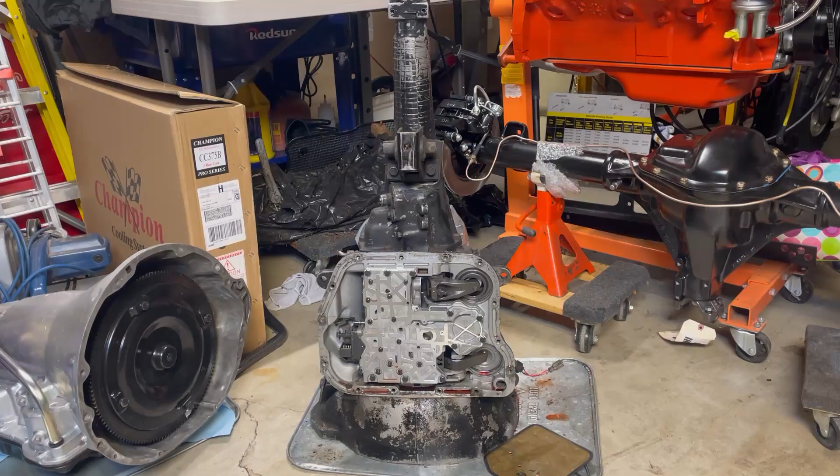Well, here's the core transmission. I pulled a 727 out of a 1983 or 4, I can't quite remember. What would it be, B350? D350 actually, sorry. Came with a 360.

I am pretty sure, not 100% sure, pretty sure this has been rebuilt recently. Within the last like 10 years. I'm not 100% on that, but I'm gonna show you why I have this theory. The first thing is, it's got this gasket in it. I don't know why they didn't like trim it down at all. So that makes me question the rebuild, but it does have a gasket.

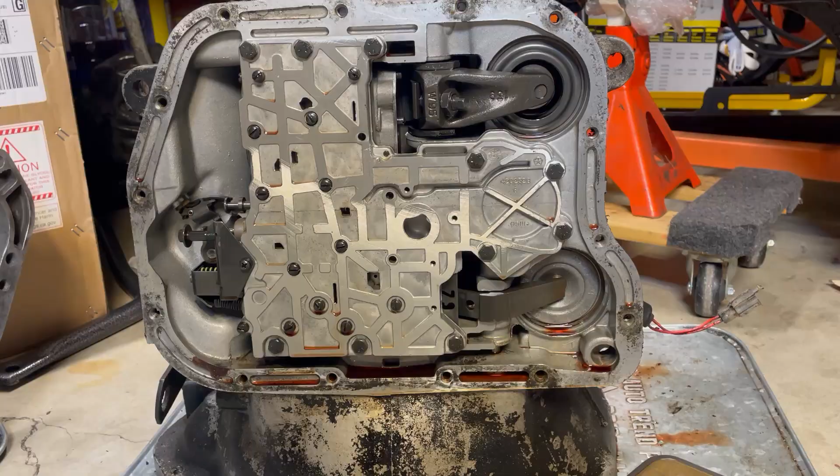And also, I don't know if you noticed, this is black paint. So someone took time to paint this, re-gasket for sure. And then on the inside's really, really clean. Now, there was a little deposit on it, and the filter has a little buildup of sludge or something. You can see that. But it's very, very clean. And it makes me think that this thing has been gone through.

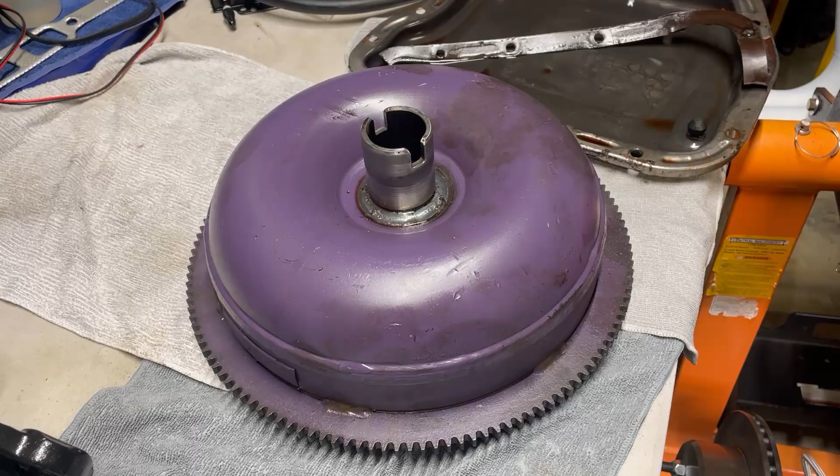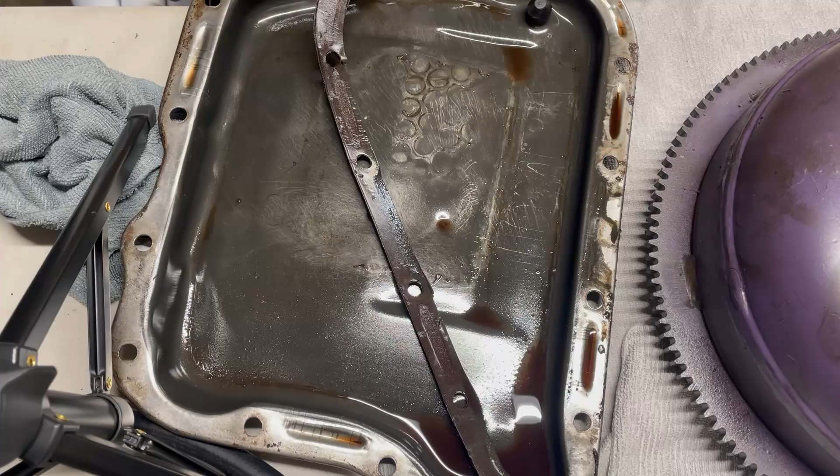And on top of all that, it has a brand new converter in it, which I don't know what it is yet, but you know, I'm thinking it's something truckish, towing related. Brand new converter. And here's the pan. It's got some sludge down here, but it's clean. And the pan has, or had, a trans temp gauge going to it. So they were even checking out the temperature in the truck. Now that's all just from the transmission itself.

The vehicle I pulled it out of made me think it drove into the pick and pull. See, it was dented up, but it was a very clean truck. And it looks like someone may have died or something, and they just drove it there to get rid of it. Now, it had a 360 in it, which I tore apart a little bit, very clean inside.

It has a 4-barrel Edelbrock 1406 carburetor. I threw that on the wagon, and it ran great on that. I barely had to tune it. It was perfect. So I think that this transmission moved this truck to that pick and pull where I pulled it out. So I do not recommend doing this, but the idea here is I'm going to put some new gaskets in it, just to be safe, so it doesn't leak.

I know how to do things right. This thing I did right. I went through every part of it. Now this other one, I should do that too. I don't recommend doing this. Taking a core from the junkyard and throwing it in, there's a good chance I'll throw this in and it won't even go into gear. But I'm taking an educated guess, and I'm gambling a little bit, and I may lose. But right now I don't have the time to go through this transmission. I would like my wagon back, and so I'm gonna send it, as they say.

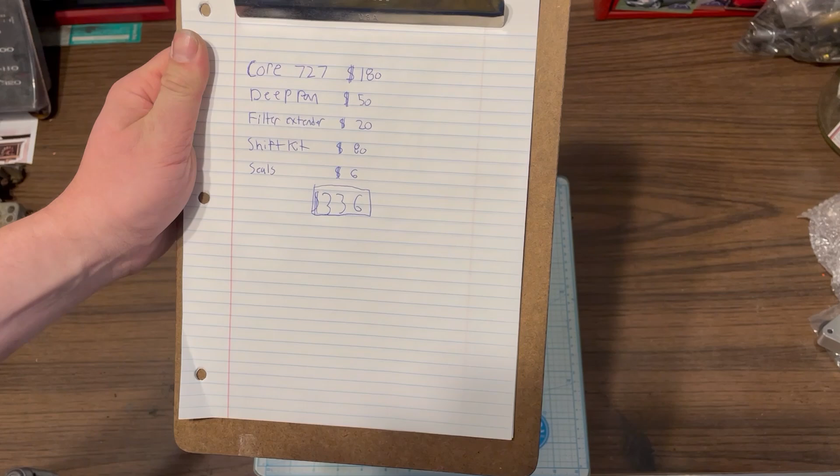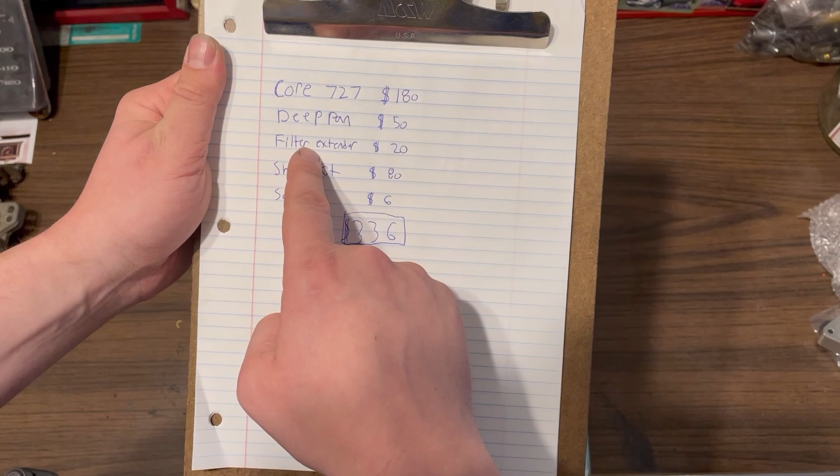How cheap, you may be wondering? Well, $336 cheap. So I picked up the core transmission from Pick and Pull with the torque converter and all that for $180. I have a deep pan, which I'll show you here in a second, the filter extender for the deep pan, and the shift kit for 80 bucks, 50 for the deep pan, 20 for the extender, and then $6 for seals. So not bad.

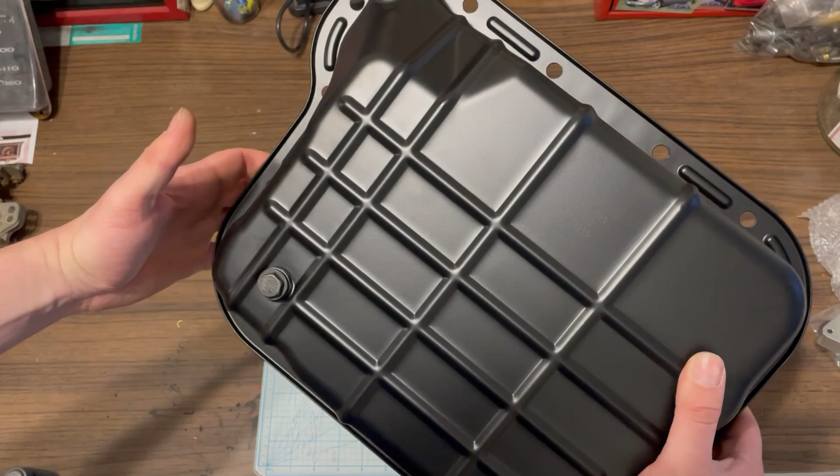Now, when you go on Google and type in 727 deep pan, you're gonna be like, whoa, those are pretty pricey. That's why I got the $50 pan. Now, the $50 pan, it's just stamped steel. It even has a drain plug, which if you have looked under any of your classic era Mopars, you notice they don't. It is a later pan off of like a 90s Dodge pickup with the later variant of a 727 with overdrive. So $50, it's a Dorman part.

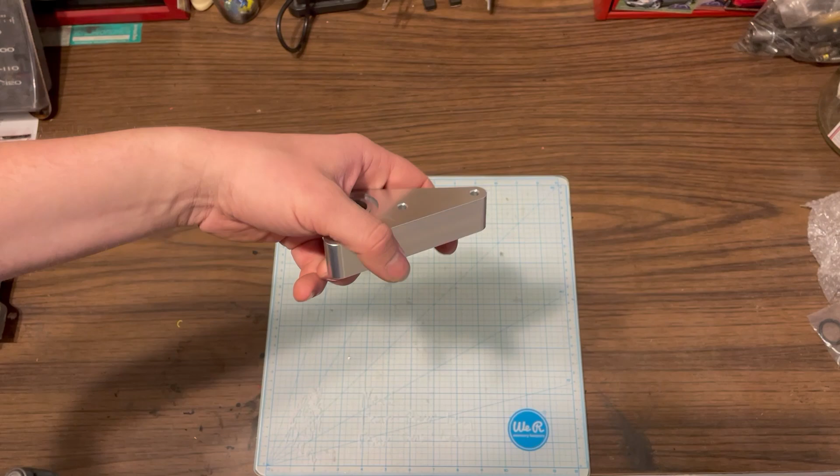Boom, there's the part number. I mean, cheap, effective. And then whenever you do a deep pan with one of these transmissions, get the extender, 20 bucks. Amazon, shipped to my door. That brings the filter down, the pickup down, and it's better in case it gets low. Just do it.

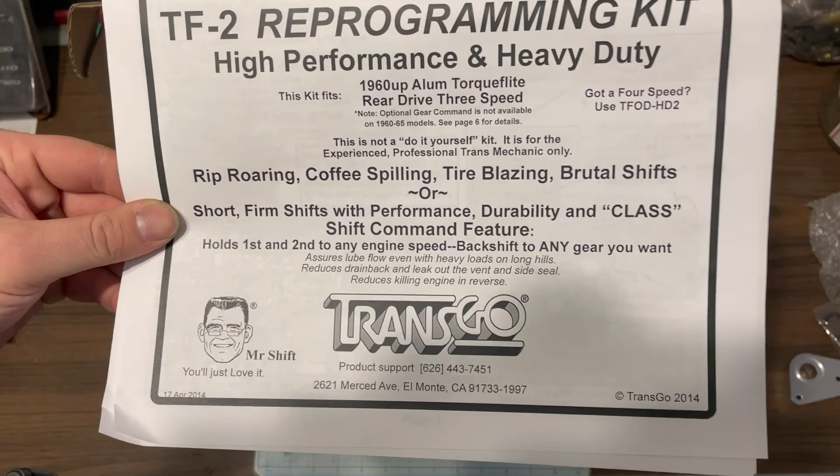And now the main thing, the thing I paid 80 bucks for, the Transgo performance shift kit. This is the TF2. I think that means TorqueFlite 2, if I would have to guess. Now, what I like about the TF2 is it's very variable. There's a lot of variables to it. You can make it fit your need. I'm just doing the short firm shifts with performance in mind. I am really just for towing. I want to save the clutches and all that, so just nice firm shifts.

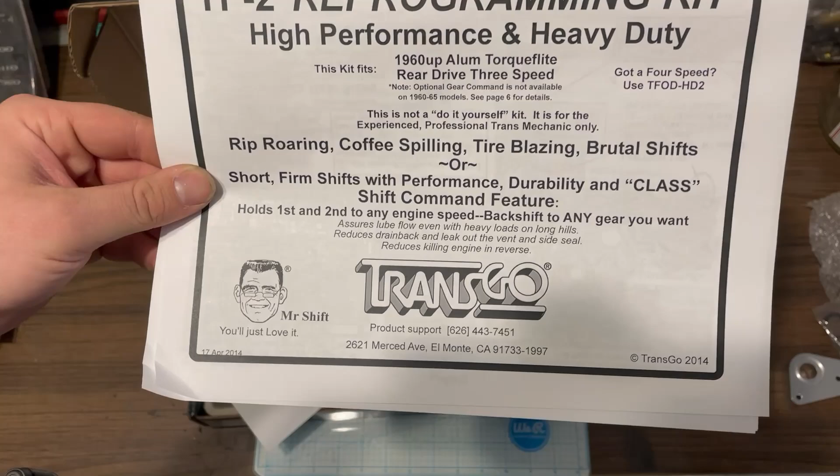But you're able to modify it all the way to the brutal shifts, and then you're even able to have gear command, which basically makes it so if you take off in first and you put it in second, it'll shift to second. You put it in third, it shifts to third, and if you want to go back down to second, you got to put it back in second. With a normal TorqueFlite, if you have it in first, it'll be in first. You put it in second, it will go first to second, up and down, and in third it'll go third, second, first, whatever you need for driving conditions. I don't recommend that unless you were doing a real race car. But besides the point.

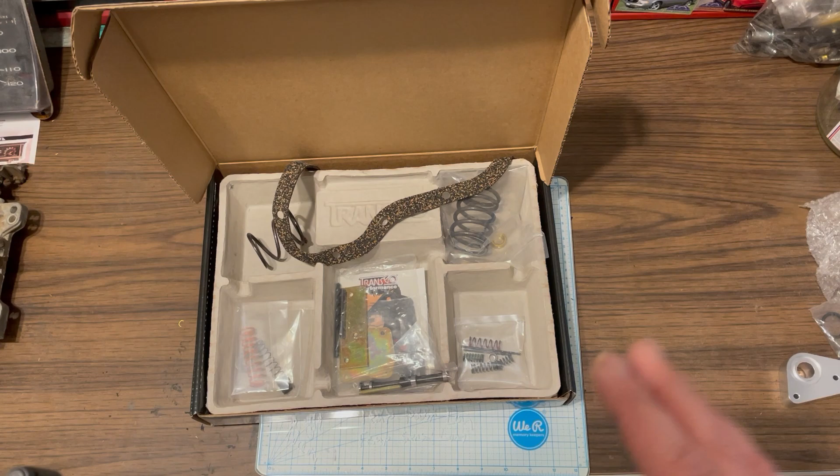So I will show you what I'm doing with this for my needs, roughly show you what I'm drilling, and go through instructions with you. As you're going to see, you need a very neat, clean work surface. This is a sit down and do it all at once. Be focused. Valve bodies still kind of scare me. They are really a marvel of engineering, in my opinion. Early automatics are a marvel of engineering, not needing anything but pressure, allowing it to shift up and down. Besides the point, I'm rambling. So yeah, I will be showing you how to install this. Won't this be fun? It always is.

All right, now we're gonna get into it. I'm gonna take the valve body out itself. The valve body is just held in with these bolts. It is 7/16, if I remember correctly. Yep, 7/16. And then you also have to take off the linkage where the shift shaft is. That is just a couple half-inch, I think, nuts. One of those sizes, half-inch, 9/16, 7/16, for both of them, and they slide right off.

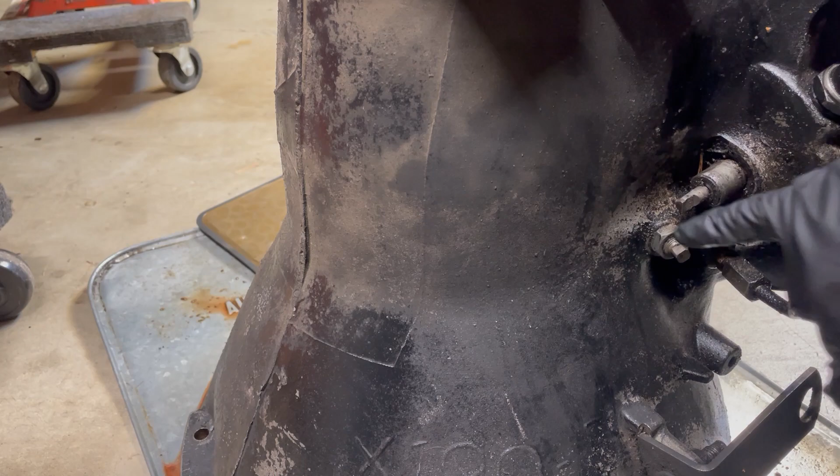I know we're at a little bit of a weird angle here, but this is the top of the 727. Up here is where it bolts to the motor. This right here is the shift shaft. There will be these two brackets, and they just slide on here. You unbolt them, pull them out. This will come out with the valve body. You may have to pull and tug a little bit, but that's what it's gonna be hanging up on. Let's try to get this valve body out.

Now, the valve body is the brain of the transmission. It does all the crazy stuff. Out of everything else, I understand the valve body at least, because on these older transmissions, it's all fluid pressure related. Some smart men drinking some big cups of coffee, wearing some nice ties and white shirts, did some math, and I don't do math that well, so I'm just amazed they came out with this and made it reliable and made it strong.

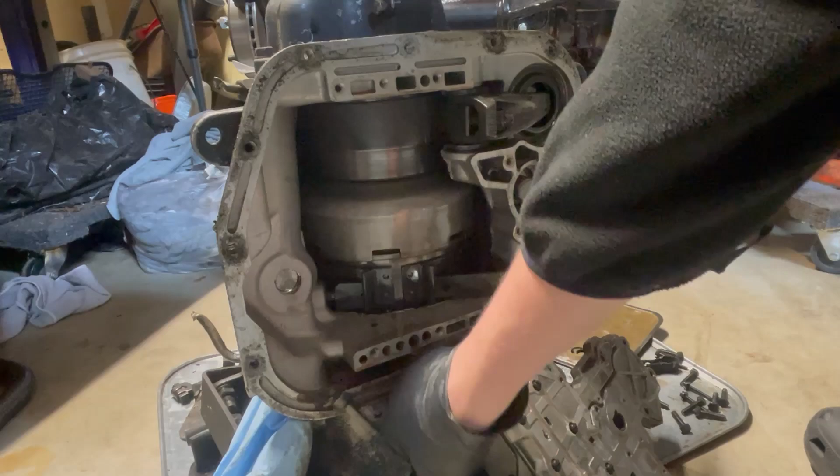Boom. So yeah, it just kind of falls out. So putting it in, the hard part about putting it back in is this parking rod. You can imagine it's like a gear in there, and this goes in, indexes in, and puts the car in park. So you may have to mess with it for a little bit, but it will go. Sometimes it's a little bit frustrating, but it will go.

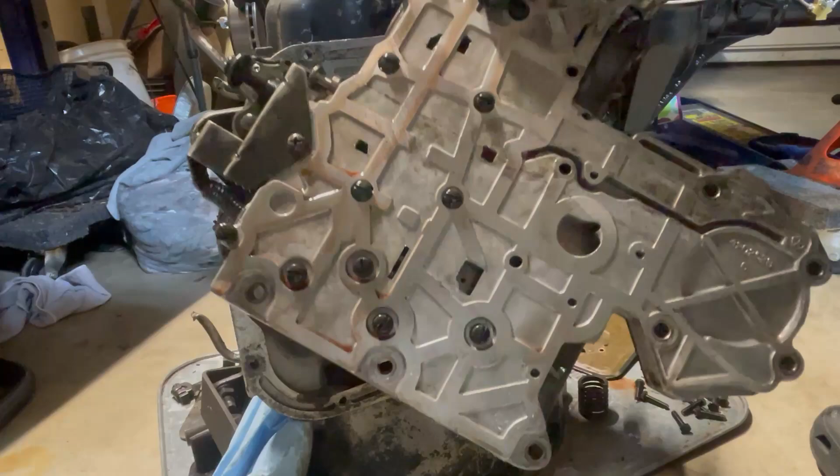Boom. So yeah, those 10 7/16 bolts, make sure those two shift linkage things are off, and it pulls right out. Super easy. And the scary part is cracking it open. All right, now I'm gonna separate the valve body. Gotta get to the plate in between so we can start doing the shift kit. Fairly easy. Just a bunch of flathead screws. This is a tragedy. All right, new screwdriver. Here we go.

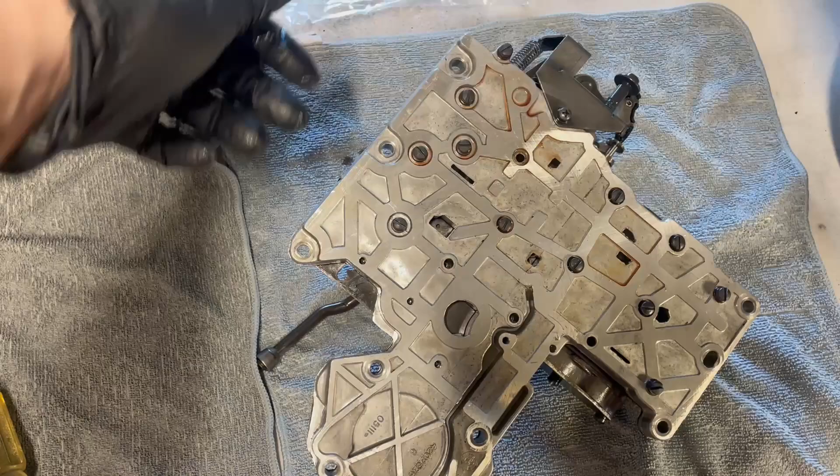You know, there is a chance, small, but there's a chance that this is already, I mean, I can see the screws have been a little messed up there. There's a chance it already has a shift kit in it, but we're gonna have to find that out ourselves here. That took a lot of muscle and a pair of vice grips, but got them all out.

So once this Phillips screw's out, the top plate here is just gonna slide right out. Now, be careful. Ooh, not the camera, be careful. Because down here in the bottom part, there is a bunch of check balls, and you don't want to lose any of them. They're somewhat important. But there is the maze that is the inside of a valve body, the passages for the fluid to go under different pressures.

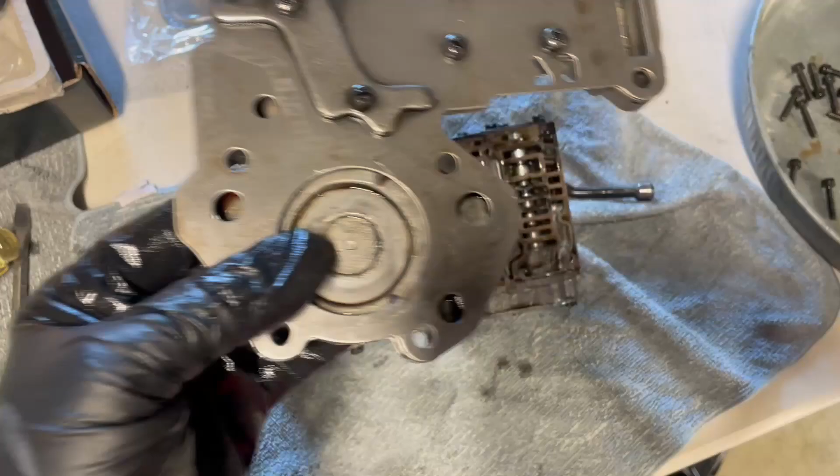I'm not seeing any modifications yet, but I'm gonna look a little deeper here and take some stuff apart. All right, I'm gonna remove all the check balls here. We'll just note if we see anything different size for later. Right here I'm noting that one's large. So the rest of these, those two are the same size. That's the same size. That's the same size. That's the same size. It's not metallic.

Screwdriver here. Interesting, that one's not magnetic. There's a piece of debris I picked up. Alright. Okay, that is all of the check balls, ball bearings. Alright, I'm gonna fully take off this separator plate. It's just 5 more Phillips screws, and the plate will be off. Once we get it off, see some sludge down there I want to clean out.

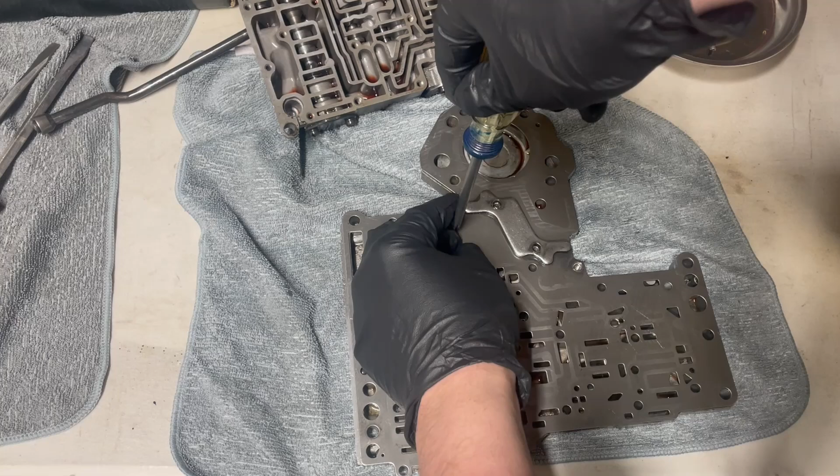But this has definitely been gone through. I've been looking for any signs of a previous shift kit, because there's a lot of ways to do shift kits. So my concern is putting a shift kit upon a shift kit and then nothing working. That's the main fear. But the beauty of it is I have a second valve body in the car. So if it does do that, I'll just take it back out and do it again to that one, because I know that one has not been messed with ever.

I don't know if this one's been messed with either. I haven't seen much evidence. The only thing is there's some scratching down here, and it looks like a hole was drilled. But if that's it, I don't know. Maybe that's a small modification they did to valve bodies. Okay. Pull it off. Put it down. Nasty, not bad. The other one I did was way worse. Sweet. So this is the thing that we're gonna do a lot of things on probably.

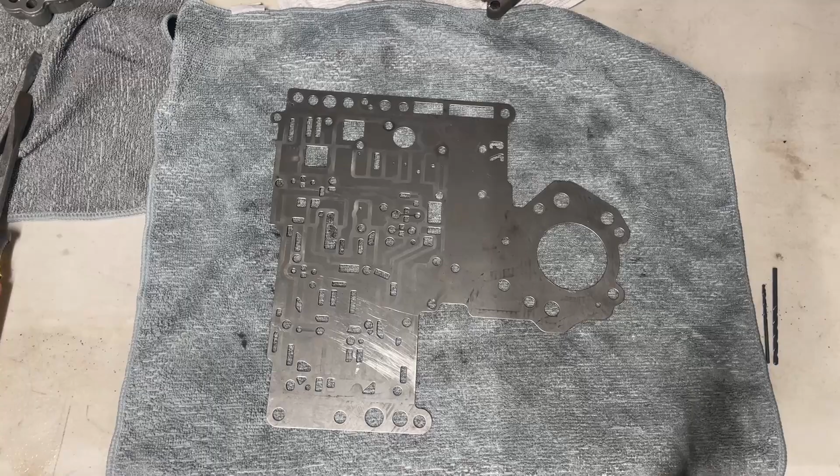All right, so I did some investigation. I haven't found any modifications in the actual casting of the valve body, but this plate has been modified per specs actually of the TF2 kit. I currently think this went through a guy who knew what he was doing, hopefully, and I think he just drilled these out to try to make it slightly better for the truck. But I'm gonna go through and explain to you what he did.

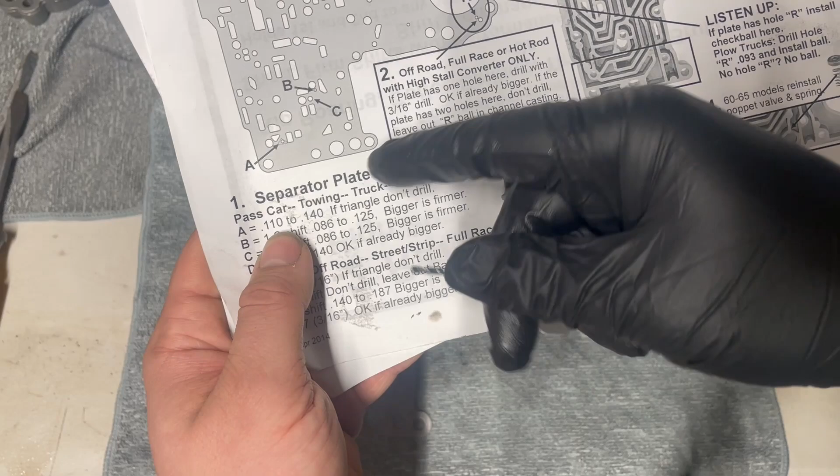And yeah, so in the TF2 kit, we are going for up here, passenger car, towing, truck, motorhome, that size. You have 3 drill bits. You don't really need that one right now, but the .086 and the .110. I have the 110 right here. So A, down here, A is 110 here to 140. And if it's a triangle, you don't drill. I, again, just for a passenger car wagon here, only want 110. So that is down here.

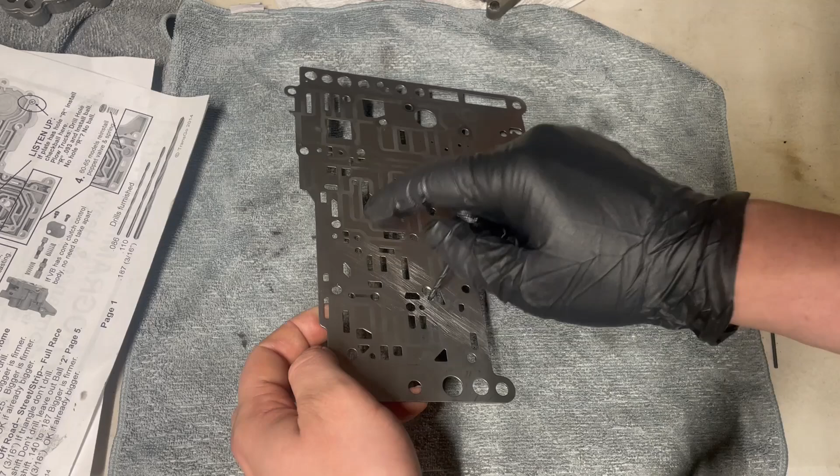That was drilled out to 110. Then we got B. B's up here. This one was also drilled out, kind of crudely, but drilled up to 110. Okay. C down here. B and C are 86 thou to 125 thou, so 110 is in the middle for both B and C.

D is all the way up here. D is 110 to 140. Okay, it's already bigger. So D would be this one, slightly bigger than 110. So yeah, that was already done for me. So that's kind of nice. So now I'm going to go through the valve body casing itself and modify this, and then we can put it all back together.

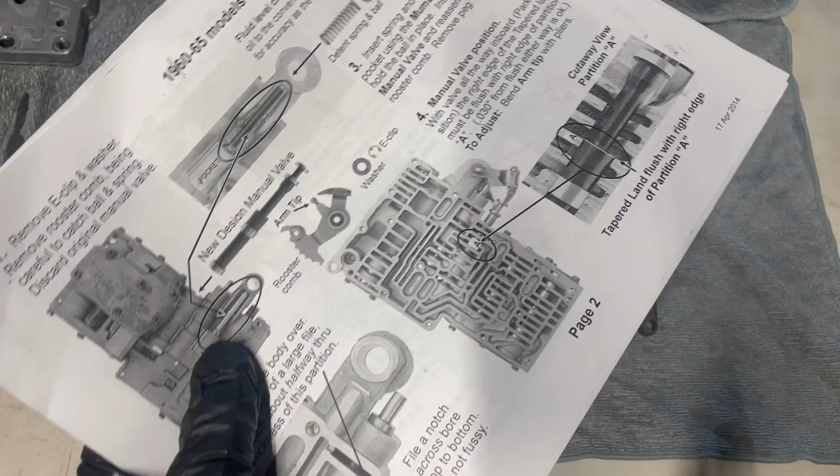All right. Now we're on page 2 here. So we've got to remove this system so we can get the manual valve out to put the new one in. And then we'll have to notch it with the file into the casting. And that'll be right there. We'll file it right there. And then we'll go over the rest of this as we do it. And that will be page 2 out of the way for the shift kit.

So there's just a little E-clip there. You're going to want to be careful when you do this because there is a ball and spring for the detent rods. So you see it there. There's a ball and spring in there, and that allows you to shift it from park to first, to reverse, neutral, drive, and all that. So just be careful, you don't want to lose that. Semi-important.

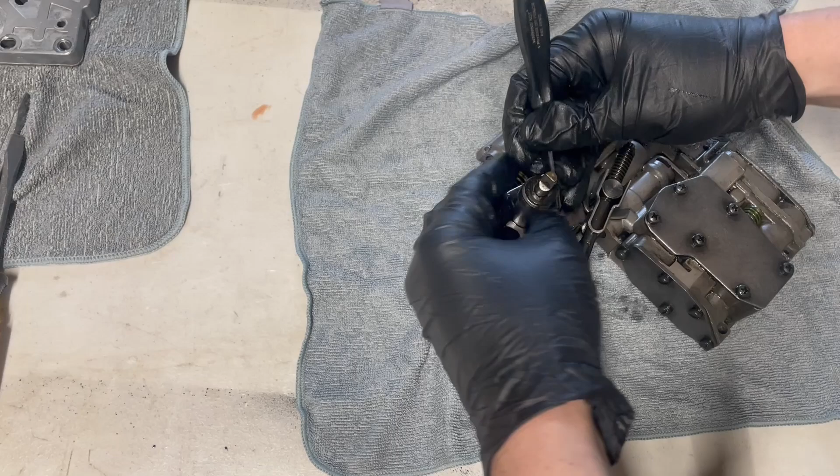C-clip out. Got the little C-clip out there. And a little washer. I'm gonna take my little pick and see if I can just get the tension off of it. We really don't want to lose that. It's kind of vital. I did it last time and lost it, and it really sucked.

Okay. Take that off. There. Take that off. That's out like that. All right, there. Grab the spring. And where's that? Oop, don't drop that. Pick the ball up. And I'm gonna keep these together. Get some tape. Just because I think it's a special size. And we don't want to be losing that like I did last time.

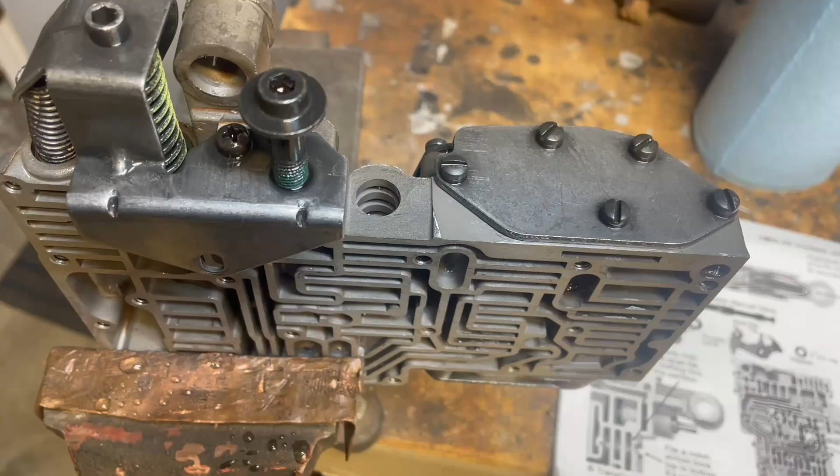All right. So on page 2, it wants us to file about halfway through the valve body, basically in the center, so about that, halfway through. It's not precise, you just gotta do it. So I try to get pretty centered. Like that. And then I'll just keep going here for a while, and we'll get halfway through it.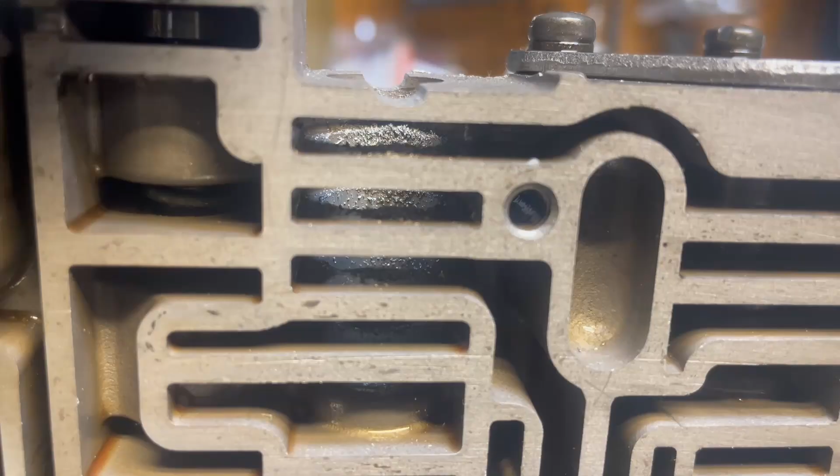All right. Filed it for a little while there, and that's about halfway through. I'm happy with that. So now I'm going to thoroughly clean all the shavings out. As you can see down the bore there, it's all filled with aluminum shavings. And yeah, I'm very happy with that. There's the photo I'm still going off of. Should be good enough.

All right, I very thoroughly cleaned it out. You want to get all of the aluminum dust out, just as much as you can. So I got it all out. Now it's time to put this back in place. Let's see here. How am I gonna do that? So that's gonna go there. Okay. So I'm just gonna do that.

We are gonna need the detent ball and spring here. That off a little bit. Okay. So spring in. Ew. Plastic off there. Come on, get off my hand. So you get this peg. Basically the peg will hold the ball and the spring in place. You'll pop on the rooster comb and then pop it in and it'll pop out. And that just makes life a whole lot easier than dealing with... yeah, this is gonna take a few tries.

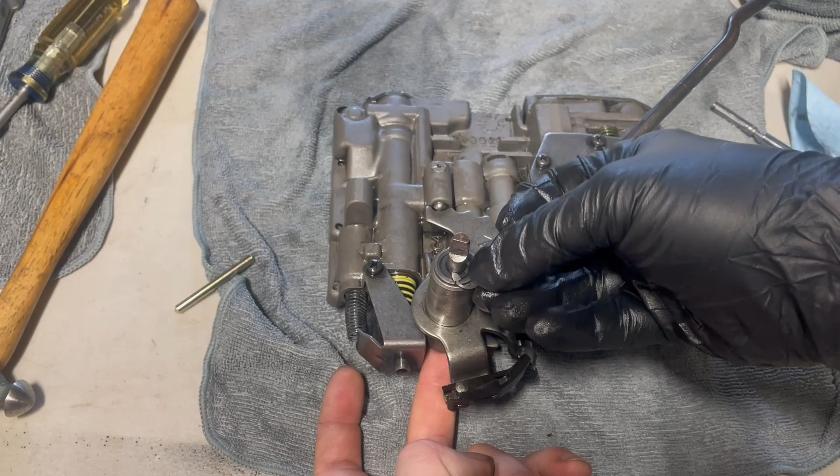Put the washer back in. Washer. And then the E-clip. Reach out over here. Oops, come on. Boom, E-clipped in. Back over.

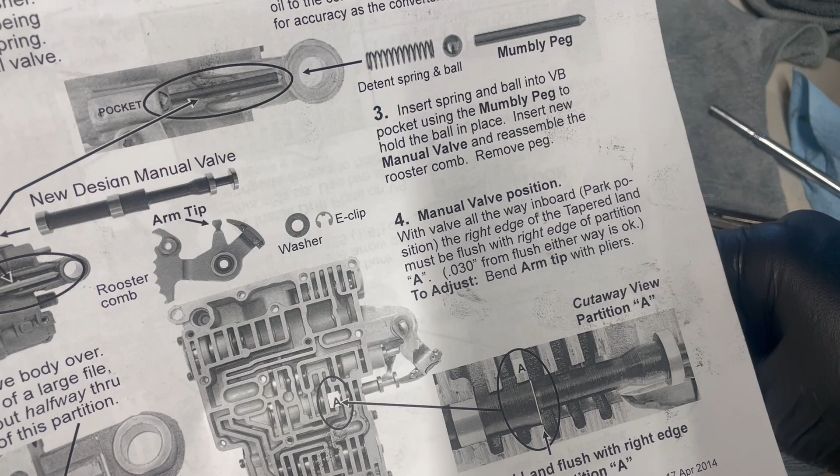Now, it says on the sheet, manual valve position. With the valve all the way inboard, in the park position, the right edge of the tapered land must be flush with the right edge of the partition A. So that would be right here. 30 thou from flush either way is okay. To adjust, bend arm tip with pliers. So let me see here. Make sure it's in park.

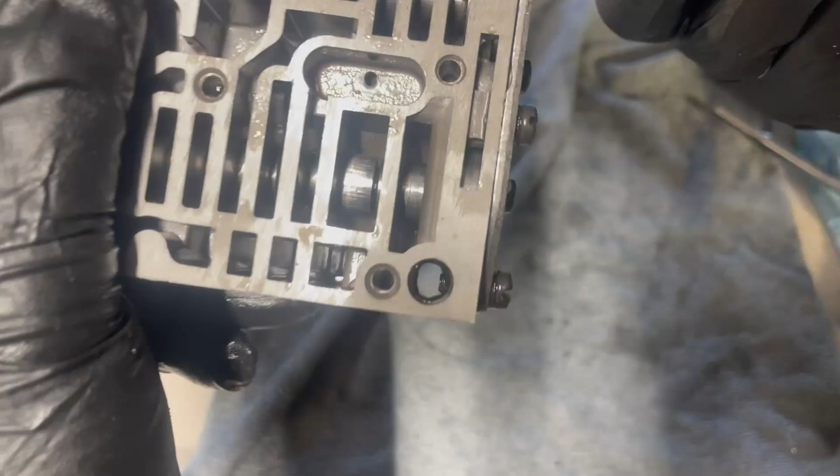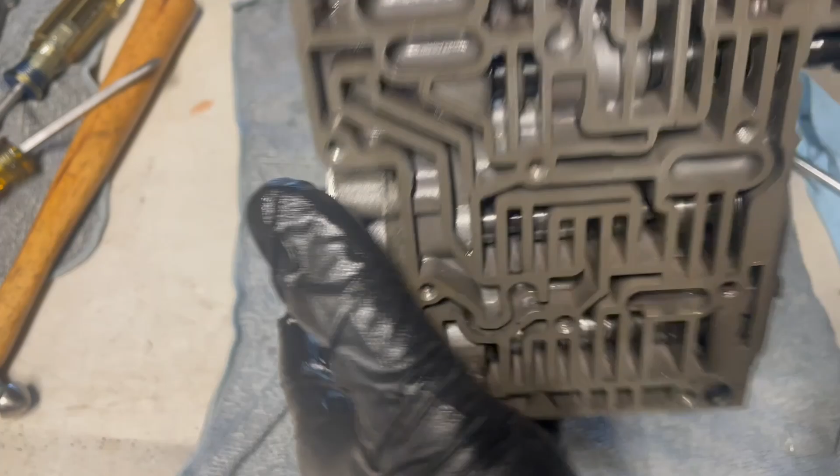That should be park. No, that should be park. I'm thinking that. Shit. Yeah, that's flush. Beautiful. So that's page 2 done.

All right. So just a reminder here, go through your instruction thoroughly when doing this, because this page is a good example. There's a lot of different types, because they change these a lot, they use them forever. There's some variations of these valve bodies. So, like here, 77 and up V8 trans with lockup. This is a non-lockup unit, so we're gonna ignore that. 77 up type valve body has 6 or 7 passages. Mine has 6 passages.

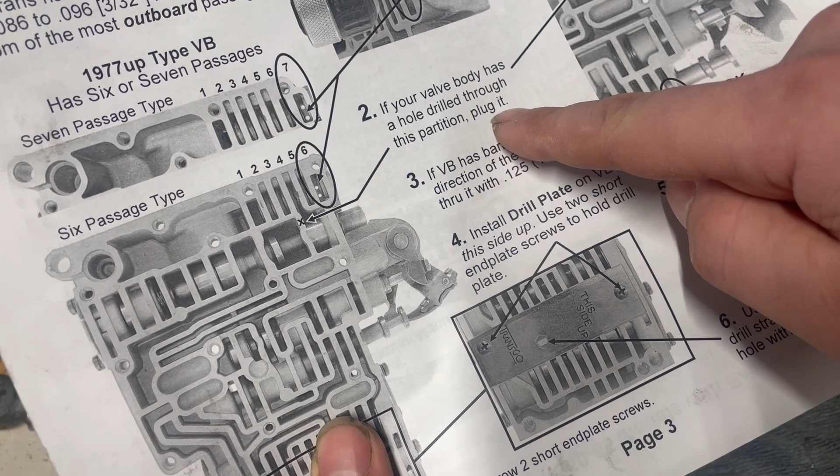If your valve body has a hole drilled through this partition, plug it. Do I have a hole? I do not have a hole. Boom. Valve body has barrier here. This direction, drill. No barrier. Okay. Boom, look at that.

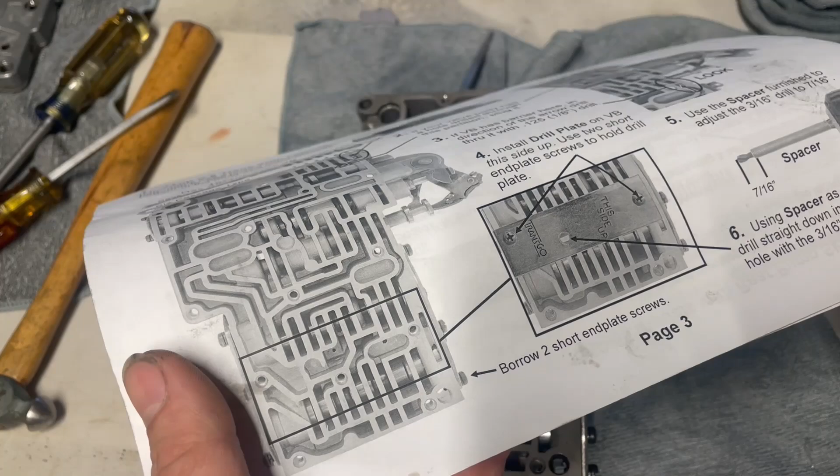So now on 4. Install drill plate on valve body this side up. Use 2 short end plate screws to hold drill plate. Use the spacer furnished. Okay. Easy. We'll grab the plate and we'll show you how to do that. All right. Plate's on. I just used 2 Phillips screws for this area over here, bolted that down. So that was super easy.

And then what you take is the biggest drill bit they gave you in the kit, which is the 3/16 one. It's the biggest one, and it's in the same package as this. And then they give you a spring. You're using that as a spacer, so you don't drill too far down. And they have it at 7/16 showing. So it's about 7/16. Probably go a little bit. I'm gonna call it good.

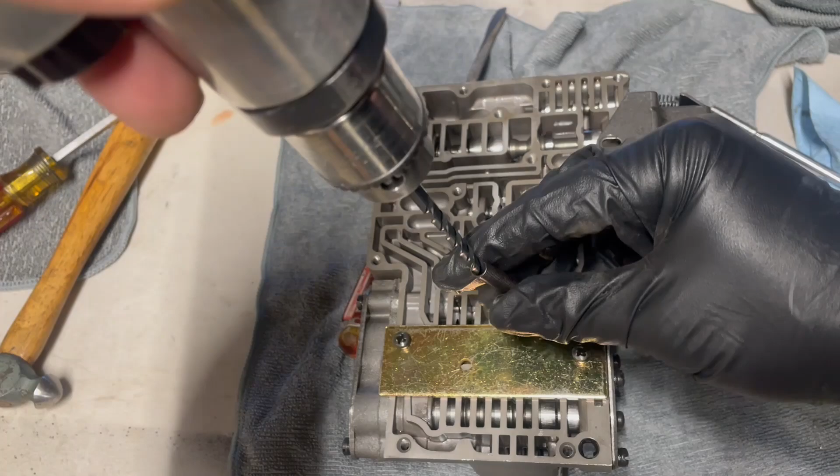And then, yeah, so let me just stick her in there, the spacer on, drill it, and then clean the valve body really good again for the second or third time. And that mod is done. So I'm gonna just do this off camera just so I can focus and do it right. But it's very self-explanatory.

All right, so I took this plate off. It was just two Phillips screws holding on still. And I pulled out from right here the TV valve, is what they call it. And for me, I got to grind this down to about 9/32. So I'm gonna do that, and then I'm gonna reinstall it with a new spring, which will be either the yellow or pink one.

So same diameter, so that's the pink one. There we go. So yellow one. So that guy's going in. With that. And yeah. So I'm gonna grind this down really quickly.

Again, the sheet even tells you the diameter to grind it down to. So you can use that as a reference guide to how short you need to make this little stem. So that should be easy. And then I will put it back together. Nice. Time to throw it back in. And then on to the next step.

All right, we're on to page 5, which is mostly about the PR setup. So the PR valve. Try to keep this nice. All right. So PR valve. We are going to remove this. We're going to remove the valve itself.

Okay, so we will be replacing... first, we'll be adding a shim. We got a new, what they call this, spring seat. And then we have a new, slightly heavier duty spring, outer and inner spring. So, pretty simple. Let's get to it.

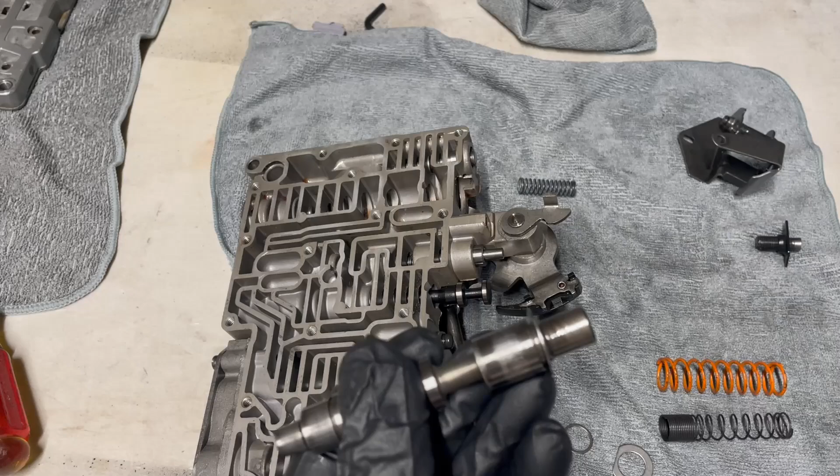All right, put our glove on. Touch the nasty stuff. And wipe this down quickly. Perfect. Here we go. So, take the old ones, put them aside. Interesting. So this already has a spacer and a seat. So I can't remember if that's stock like that, or maybe this one has been already slightly modified, but we got new ones.

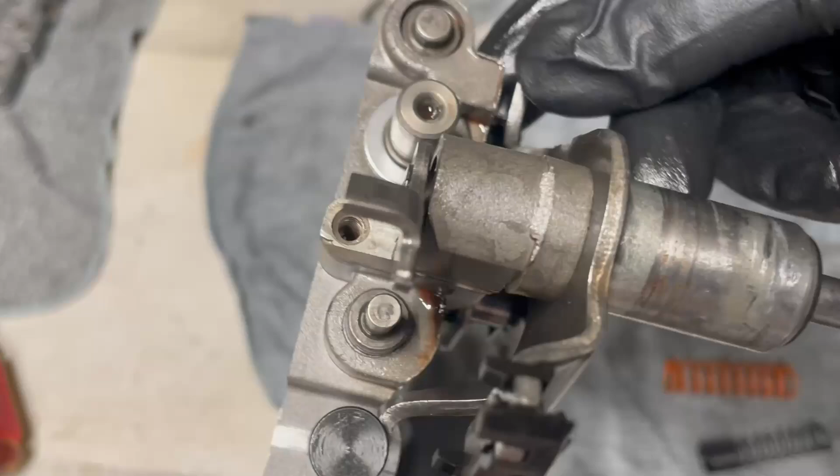Boom, boom. In. So instructions say you want to make sure, oh, come on. You don't want the seat, this one with the flat edge, you don't want that catching on the casting at all. And if it does ride on the casting, it says to file the casting down so it can't. And I have a little bit. Yeah, it's in there a little bit.

Yeah, and it says, install spring seat as shown, make sure flat on spring seat has some clearance from casting. File casting if necessary to give it a little room to rotate slightly. Do not allow to bind between PR valve and casting, with an exclamation mark. So, I'm gonna take this back out. I will file that and be back shortly after I file this and try to make it work.

All right, now it's all fitting good. I cleaned the valve body very, very thoroughly again, trying to get as much of the dust out of it as possible. And I reinstalled it here, put the springs on.

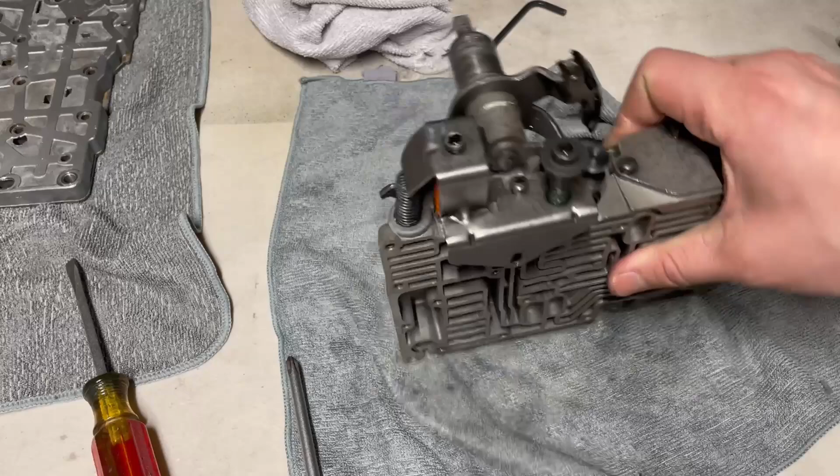I want it to be known, as I got frustrated, and as soon as I turned the camera off, I did it like first try, no problem. So I want it to be known and stated that I really tried multiple times to do it on camera, and then, anyway, this is now on.

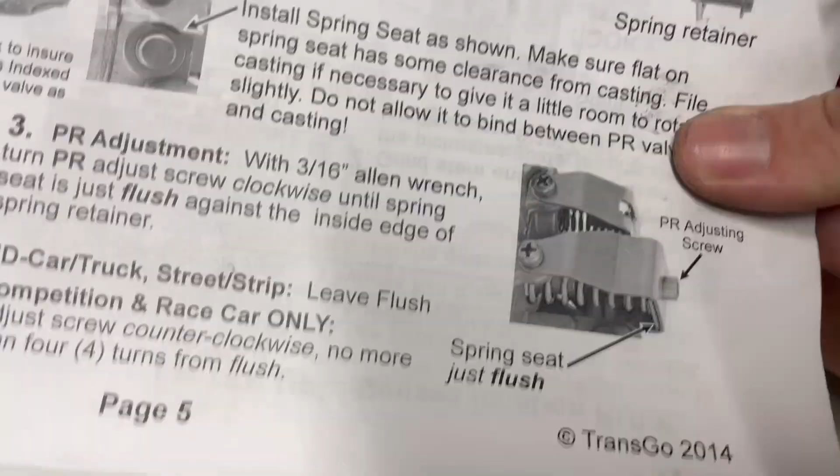Now the instructions also say here the PR valve adjustment with a 3/16 Allen wrench. Turn PR adjustment screw clockwise until spring seat is flush against the inside edge of the spring retainer. And there's a photo of that. Just one more time. Flush.

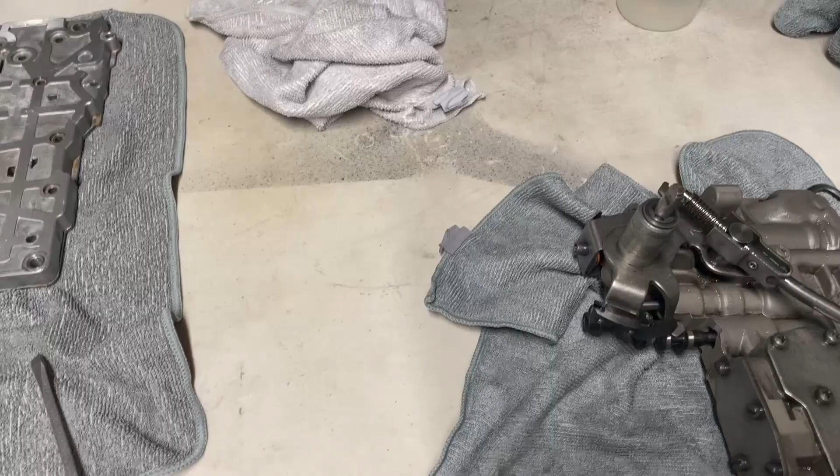So that's just for heavy duty. For competition race cars, they say counterclockwise, no more than 4 turns from flush. But again, going in a big old wagon, so good enough for me. So the next page is for shift command, which allows you to grab any gear when you want. Not doing this, again, that's more for race car, but that is an option on the TF2 kit.

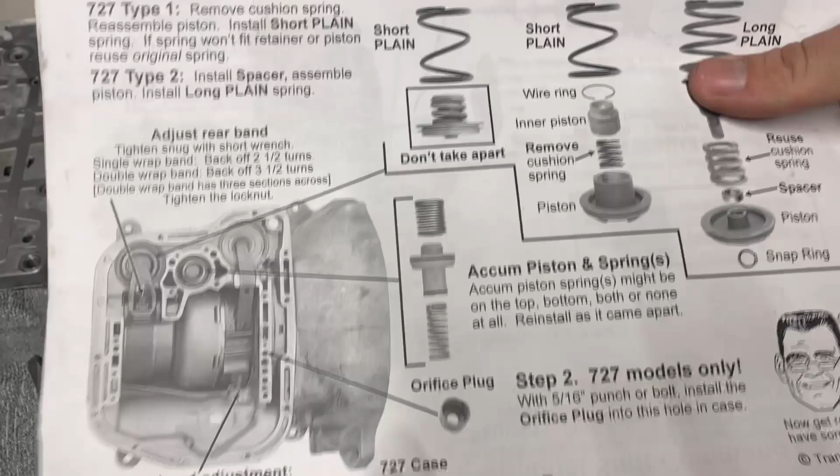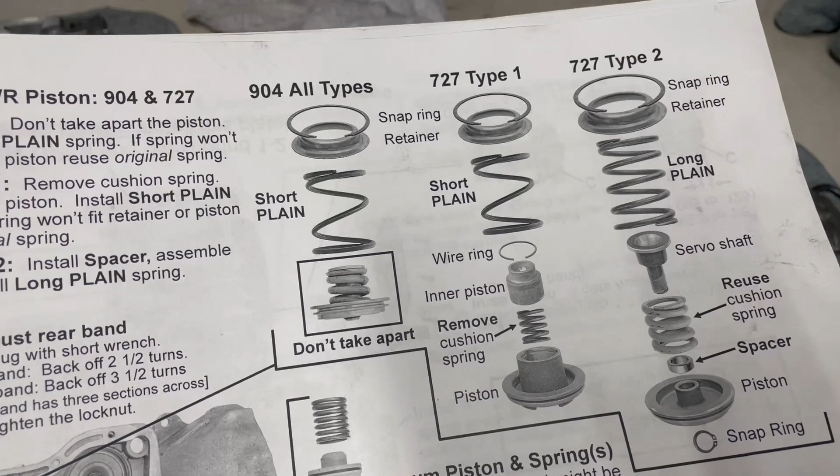All right, so we are on the final page here. So we are gonna plug an orifice and make it smaller to build line pressure. And then, I think I have the type 2, not for sure, but we're going to modify one of the pistons here. And then we have some new adjustments for the bands. So we'll tie those up, and then we should be all done with the shift kit. So let's go on to that final portion.

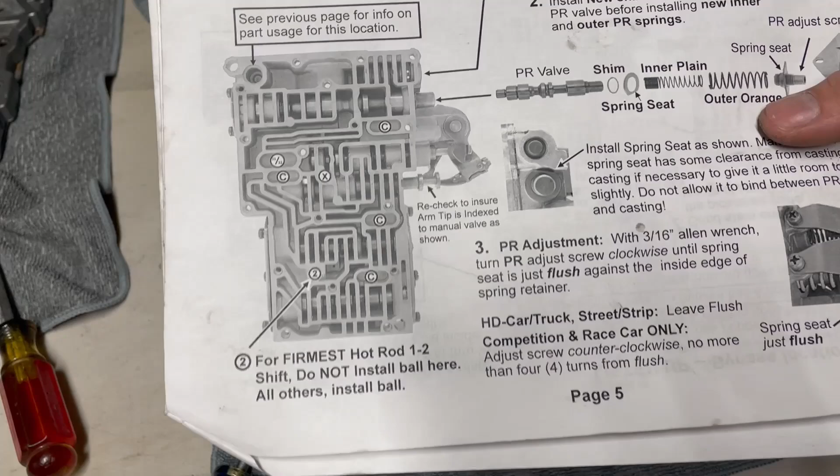All right, so before we go on to page 7, sorry, we have to finish up page 5 here, which is just gonna be check balls and reassembling the valve body fully. So I'm gonna go over all the check ball locations and putting them back in. And then we are going to put the separator plate in, screw the other part of the valve body on after I double check everything, make sure it's all fully clean. And then the valve body will be done fully. And then we can go on to all the extra stuff in the transmission itself. And we'll be rocking and rolling.

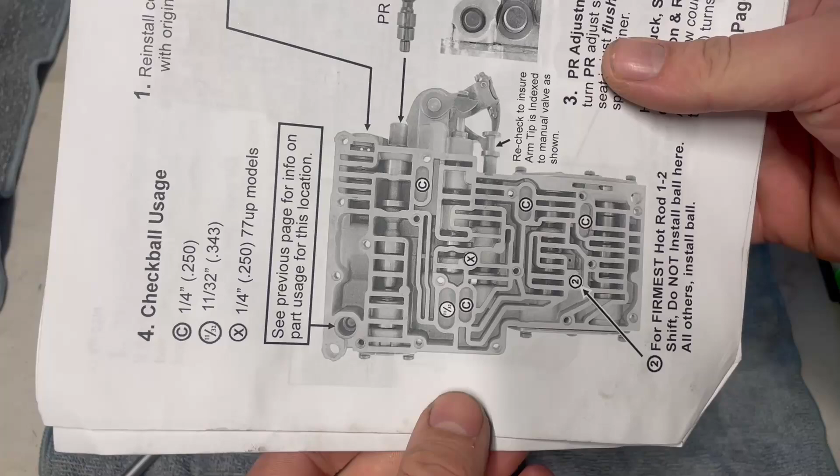All right. Installing the check balls. So here we got it lined up there. So big one goes there. Boom. I have a 77 and up, so that one goes there, there, there. This one is for firmest shifts, hot rod 1st and 2nd shifts. Do not install ball here. All others, install ball. Again, going in a big old wagon, so we won't put it there. We will put it there because I don't need harder shifts. So yeah, let me start grabbing. Boom. Boom. Boom.

Boom. Boom. So this one, the one that you don't have to install to get the harder shifts, was a, I don't know, it's non-magnetic, whatever it is. So I'm putting that back in there because whoever put this together probably knew what they were doing. So it was there. So boom. That is all the check balls in.

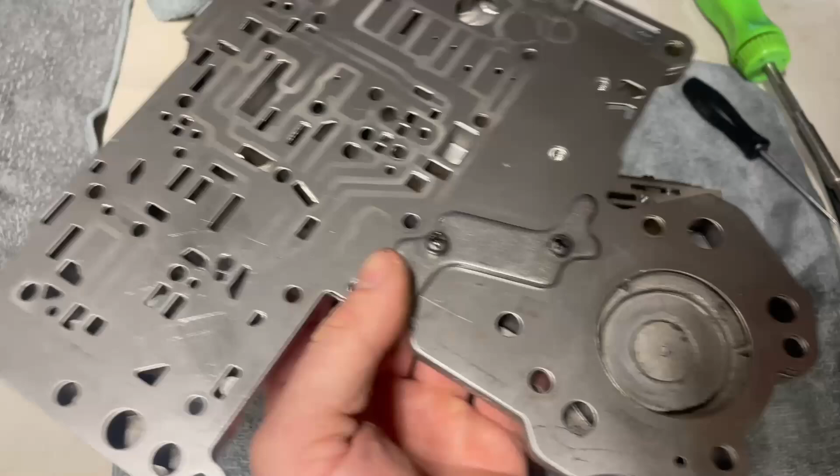So now I'm going to throw the separator plate on, the other half on, screw it all together, and install the valve body back into the transmission. So I got the separator plate on the other side, put the stiffener plate on. Threads were actually kind of messed up here. I had to take the washer off this one, which is probably not recommended, but I don't feel like fixing the upper threads at all. So we're just gonna run that. So all the check balls are in.

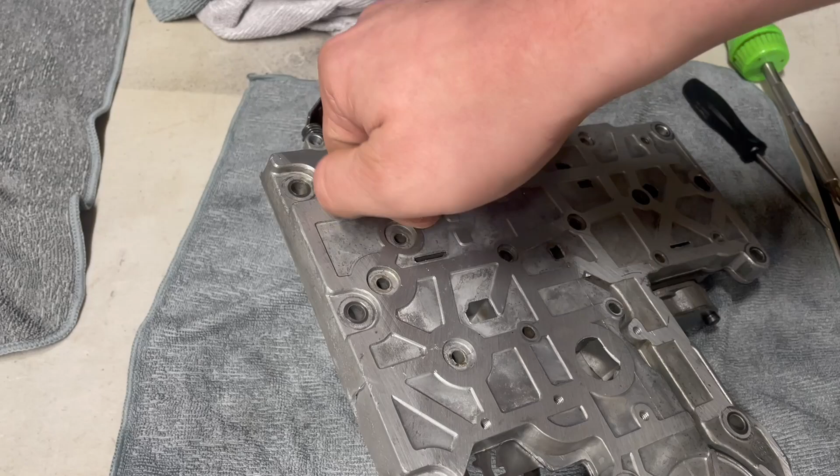Should be something like that. Okay, I see. So we got it in. Time to throw some screws in. I will come back once I get all these screws in and tightened, not too tight this time. Won't do what the last guy did, but yeah. So I'll be back in a second.

All right. All the screws are tightened down and torqued. The one thing I want to note is on the stiffener plate slash separator bracket here, I didn't note, there's 2 more screws there, and there's 1 more screw underneath this all. So don't forget those. So now I am ready to throw this back in the transmission. But before we do that, we have page 7, final page.

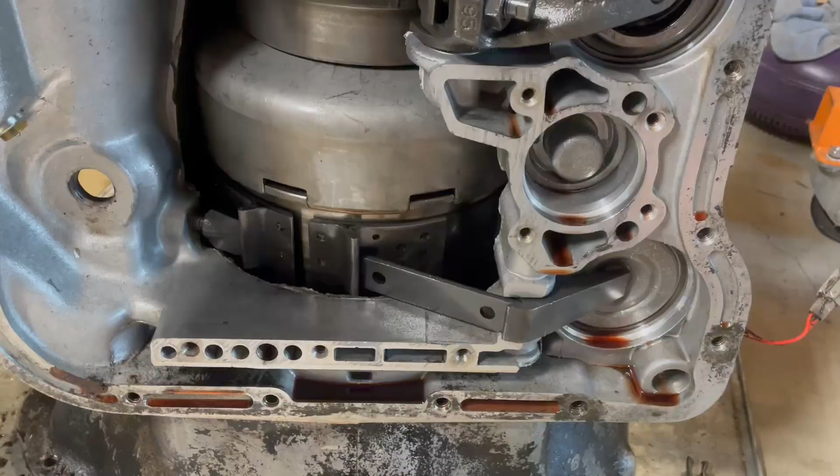All right, got the little orifice plug that goes there. I have a feeling I'm gonna hit it once, it's not gonna work well, and then I will cut to it being in, because... all right, I'm gonna cut to this being in.

Installed. So to get this out, you need this out of the way. And there is a little metal tab clip in there. And I've heard some people say they can get it out with this in place. I was not able to. I tried for probably 15-20 minutes and I gave up. So to do it properly, what I'm going to do now is you remove the 6 9/16 bolts for the tail shaft, 2 Phillips screws.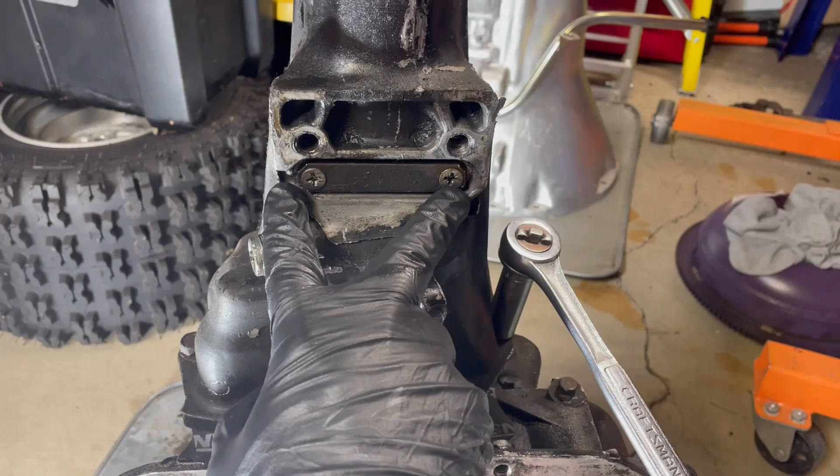There's a little thing, squeeze. Tail shaft will come right off. And there's a pin here that holds this arm on. We're just going to pull it up, knock it up, pull this out of the way, get access to this. I didn't want to do this because now I'm going to need either a new gasket or, I mean, who knows how this is going to go, but we'll see what happens. A little extra work, but we're doing it proper, so it'll be worth it.

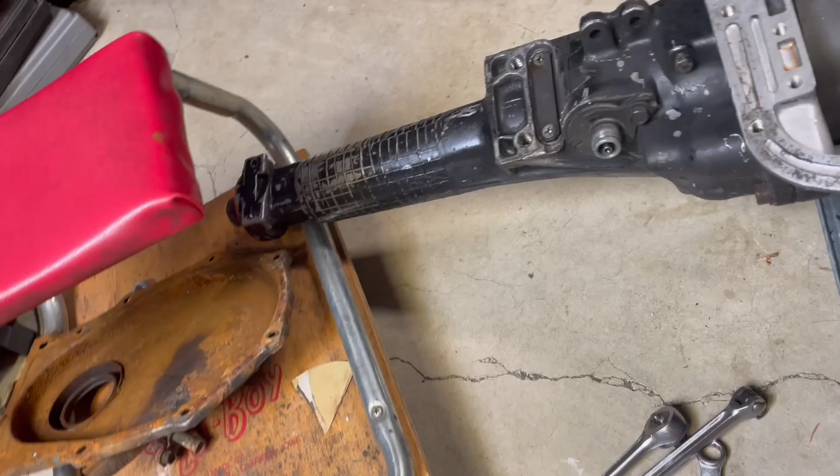All right, I get you want things to be tight, okay? But that shouldn't require this to break it free by hand, with all the force I give it. Don't do the ugga-duggas, I beg of you. I already did it, but you just do that. And then that. And then you do that some more, and it'll come off.

Side note, for me struggling for like 15 minutes, you gotta take the speedometer gear out if you want to take the tail shaft off, or else it binds up and then you get mad. My loss to your gain. All right, now to get the spring out itself so we can finish the shift kit. Now to do this, I'm gonna have to not film, it's gonna be a 2-hand procedure. I'm gonna compress this as much as I can, and with a screwdriver, pop this little clip out. And it's gonna be under tension, so you're gonna have to press pretty hard. But once that's out, this should all pop out, and I'll be able to finish this off.

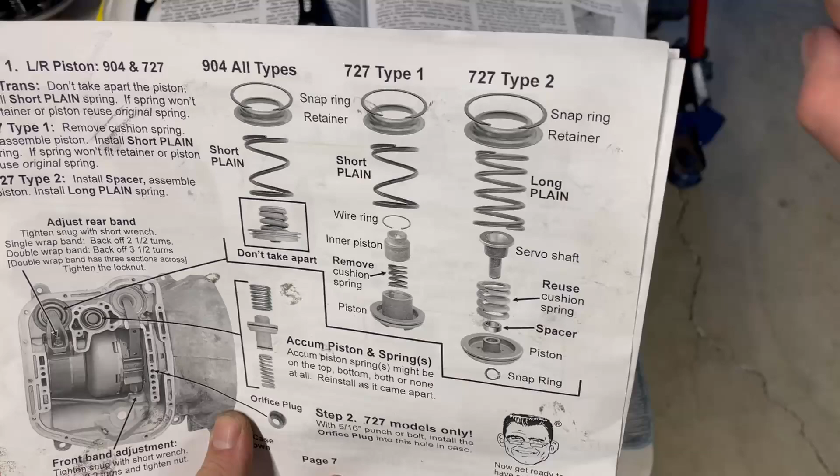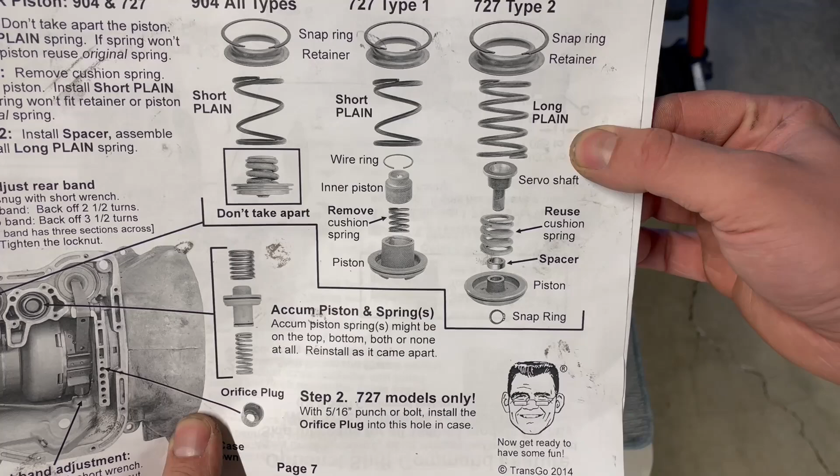All right, here it is all apart. Here's the top of it, all the way down. To disassemble it, there's just this little snap ring at the bottom of it. Take that out, and it all just pops apart. So there's a few different things you can do here. I have a 727 Type 2 one. That's that one right here. And the only thing, let's see here, I'll be adding a spacer, it looks like, and a long plain spring. So let me get that, and we'll start reassembly of this item.

All right, so open the package. Here's a long plain spring. Give you a nice little spacer here, and I also thought it was kind of nice of them, they gave me a brand new C-clip to use. So I'm gonna put this back together, and then we're gonna throw it all back in, and we should be ready to put it all back together finally.

One quick side note about doing the Type 2 one. With that spacer in there, it's gonna put pressure, so to get that C-clip in there, you're gonna have to put some force down on it. Beforehand, it just comes out really easy, but I just wanted to note that. Not that big of a deal, but something to take note of.

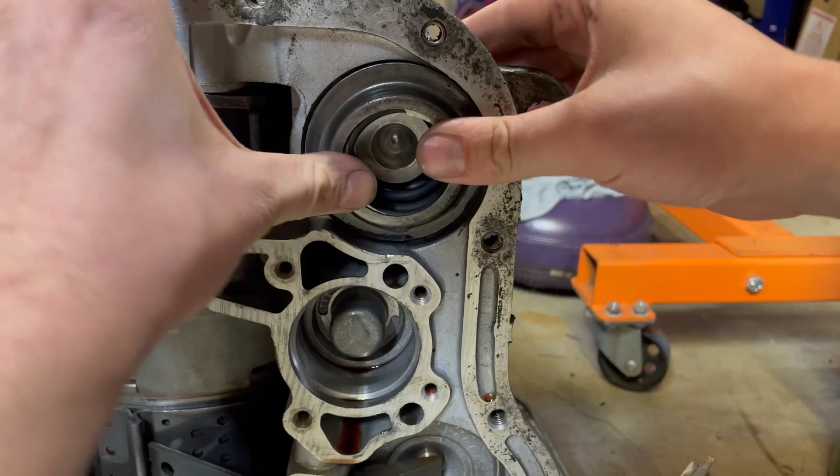All right. Got the assembly all put together. I put this in the vise just so I could easily do it. You don't need a vise, you get 2 people. One person press down, another one put the C-clip in. So now, it's probably gonna be harder to do this time. No, that won't be that bad. Let's see if I can get this on film. Here we go.

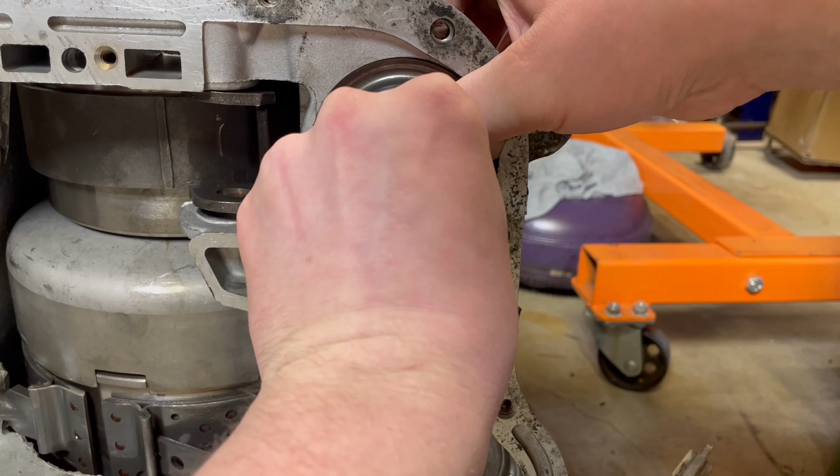Grab a screwdriver. Here we go. Boom. Let's make sure. That looks like it's in fully. All right, now I'm gonna wipe down inside here a little bit, and then I can put this back, and then the valve body, and the pan.

So for adjusting the bands, the TransGo manual says, basically what you do is you loosen this nut, and I'm using a 5/16 little short wrench. With that nut loose there, you tighten this until it gets snuggish, and then you back it off depending on which band you have. I have a single wrap band. Single wrap, you back it off 2.5 turns, which I already did. If you have a double wrap, you back it off 3.5 turns, and then you just tighten up that little nut. Boom, you're done.

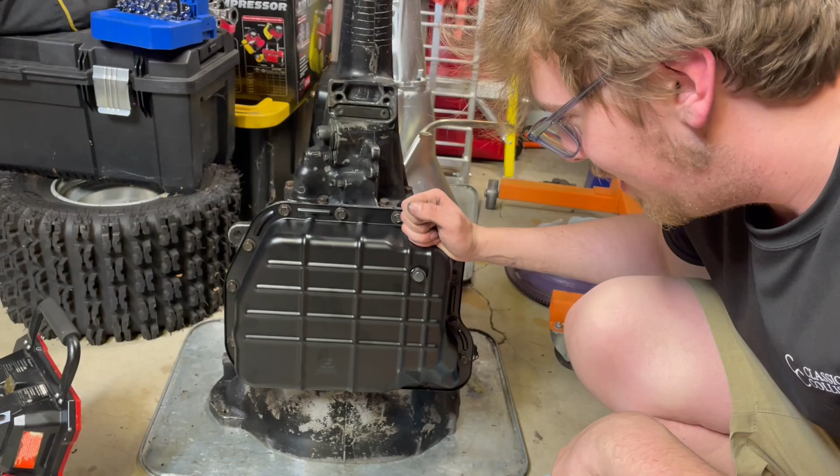Well, the pan's on and torqued. Don't forget to tighten this up. On the comments on the Amazon listing, people were mentioning how it is not tight all the time. So double check that. Don't want to leak your brand new ATF out. Yeah, so this is done. I'm going to drop it down, throw the torque converter in, and I guess I'll send it up into the wagon then. That'll be another video on its own.